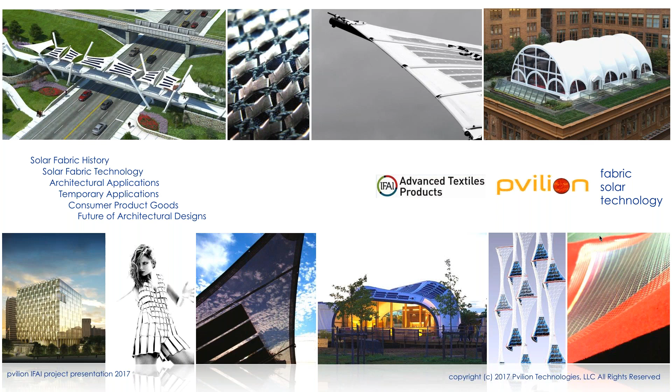So what I'm going to talk about is a little bit about our history, the history of solar fabric, and how it's evolved from a technological standpoint and from a market standpoint, and then get into three main categories. One is architectural applications, which is more on the construction industry, grid-tied, large-scale applications of fabric integrated solar. Then the temporary applications, which might be portable products - umbrellas, canopies, awnings, temporary tents, shade structures. And then the consumer products goods side, which is more of what we're talking about on the small mobile charging, remote location applications.

I also want to emphasize that there is a poll, and I'm going to talk about those three markets and those three different technology opportunities. However, if people can answer what they're most interested in - if we have a disproportionate number of folks who have particular interest in one market or one technology, I'd love to discuss that in more detail. Not that we're going to drop any of the other topics, but I think that's important to realize.

I just want to talk a little bit about our history and where we come from. My partners in Pvillion are Todd Dalland and Robert Lerner, both from the FTL business. So our background is in lightweight structure engineering and tensile structure design. That's kind of our DNA and where we come from, founding FTL in the 1970s, which evolved into a lot of technology development through the 80s and 90s. As part of that technology development, we got into integrating solar cells with fabrics with the express and initial purpose of building portable tents that produce electricity.

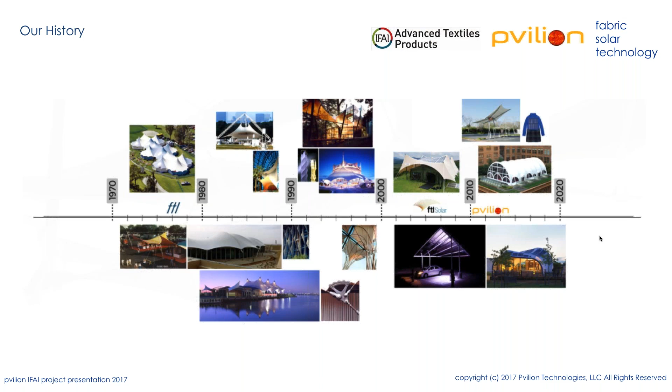That evolved with the U.S. Army in developing military products. Those military products, still in use, have evolved to architectural and temporary applications. So most of our business is currently in commercial applications, though we are involved with the military currently as well.

So I want to talk a little bit about the technology as evolution and sort of where we've come from. A lot of folks think about solar and flexible solar as thin film. It's this sort of early promised lightweight, low-cost, roll-to-roll processing. Just a spoiler alert, thin film did not pan out to be what people thought it was. So we've been working with thin film for decades, but really what it is, it's a product that can be manufactured a lot like on a printing press, where it's a roll-to-roll process where you could build a product or a product line that is miles long, and it's theoretically really cheap to manufacture.

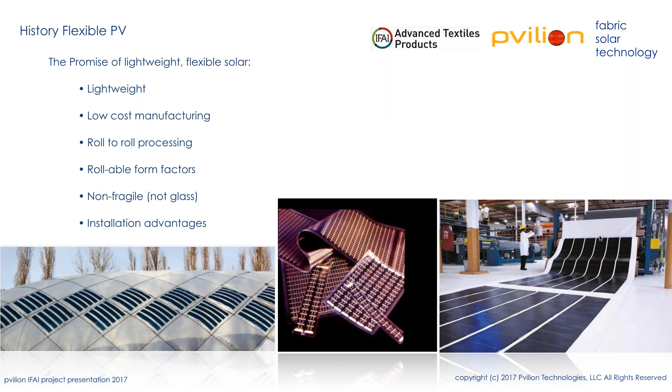However, these promises really didn't pan out. There are tremendously high-quality thin film products out there, but the efficiency is low and the cost is high. So what we have really evolved from the thin film industry, although we still work with a number of different thin film materials. We think that there's promise, but it's not really the promise that was anticipated 20 years ago.

So what we've done is we've really evolved, moving into more traditional materials, using different crystalline and monocrystalline cells integrated into non-traditional materials. But what I am doing is just showing some thin film applications early on of integration of thin film. And the promise is there, which is lightweight, flexible, easy to install. That still is our goal with our products, although we're not using as many thin film devices.

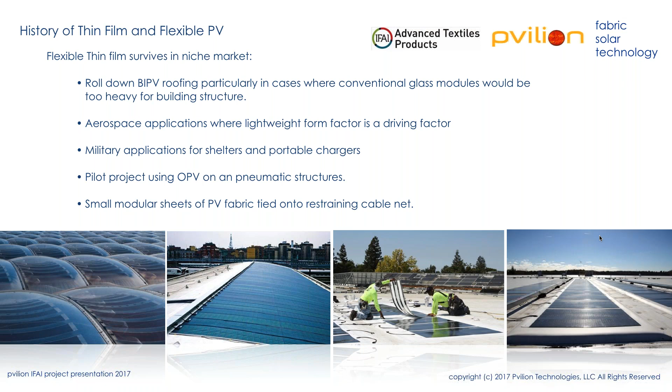So what we've really done is we've evolved in terms of the technology we've been using. I would say most of what we're doing is with monocrystalline material. It's low cost in comparison to a thin film or a super high efficiency flexible cell. It's more traditional - it's what you'd see in any glass mounted array. So what we're doing is taking more traditional solar cells, which are proven, cost-effective, lightweight, easily accessible, and we're laminating them into fabrics and into alternative building materials.

Now, these have been proven over the years, and that's a big reason why we've evolved to work with a lot of monocrystalline. You can see in the middle here two different types of thin film technologies, which have promise and have had promise. But there are some significant cons, mostly that they're expensive and lower efficiency. So what we lose in flexibility with the monocrystalline, we gain with efficiency and price.

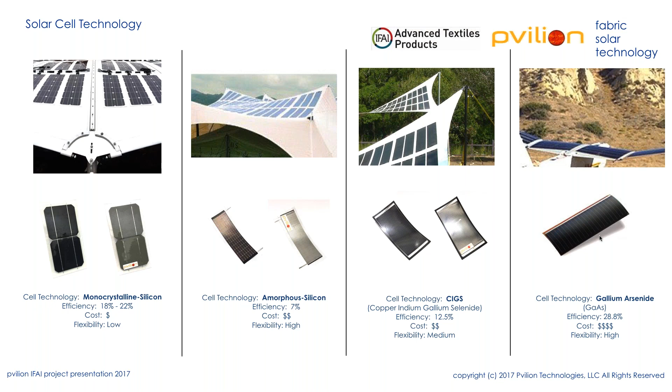Now on the right side, you see a much higher efficiency, much higher cost solution, which might really be for military and high-end commercial applications - drones, UAVs, remote locations, soldier systems. Those are great products, though approximately 100 times the cost of anything else on the market.

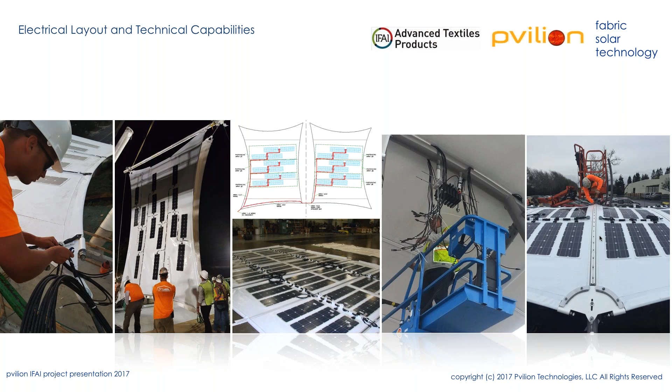So what we're really doing is saying we can take these cells and laminate them into large-scale architectural applications for industrial use and for commercial use. And that means that these are grid-tied. That means they're coming from a place of architectural code. That means they meet NFPA, that means they meet all the UL standards. So what we're doing is structurally engineering products, and also electrically engineering products, to develop systems that are holistically integrated.

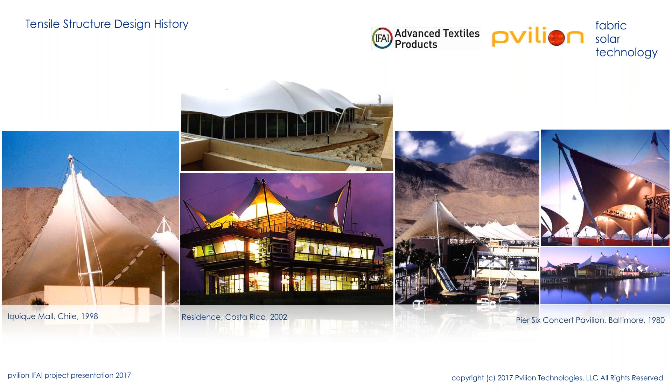I'm going to go backwards a little bit and just get into the types of structures that we've done in the past - not on the technology side, but on the development and engineering side. And then, as you can imagine, any of these types of structures, which we've been developing for decades, can now be solar powered. That is for new structures, for retrofits, for building facades and temporary structures.

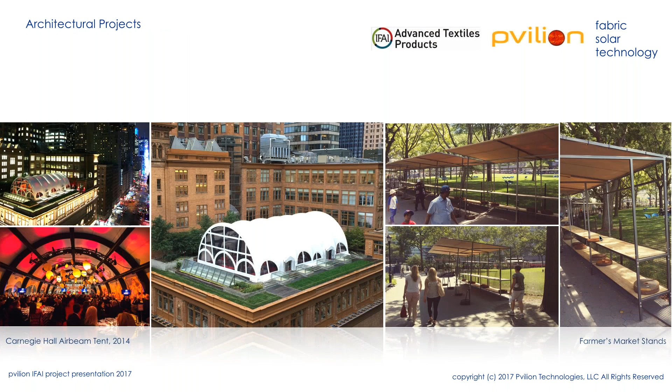So now this is a non-traditional application of solar. Rather than integrating the solar cells into a flat glass laminate with aluminum frame, we're saying we can integrate these cells into perforated aluminum panels, fabric, ETFE, structural membranes, and we can build passive shading elements as part of the architectural design. So what we do is work early on with architects to develop these systems, and then our responsibility is to provide the materials, all the testing, structural engineering certification, electrical engineering certification, and all of the design, build, install requirements for the project.

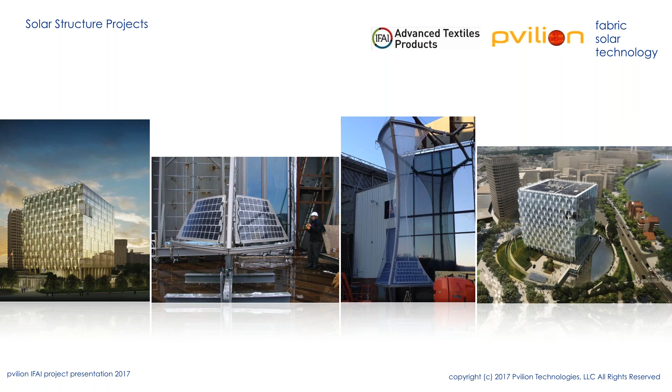Now, while some of the applications are permanent, even if they are permanent, you need to think about things like warranty and replacement. There is minimal maintenance, and when maintenance is done, you have to think about how you'd actually maintain these systems. So we've developed a couple ways of creating double skin roofing membranes, which might be for an industrial application, or for a large-scale tensile structure - stadium roof, amphitheater. What that's really looking at is how you can install and remove these systems without replacing the entire membrane.

So that's for a retrofit or for new construction. What we've done is we've developed a system that can take a fully finished solar membrane with all of the electronics, all of the wiring, all the solar cells laminated in, pack that up in a truck and bring it to site ready to plug and play install on an existing or a new membrane structure.

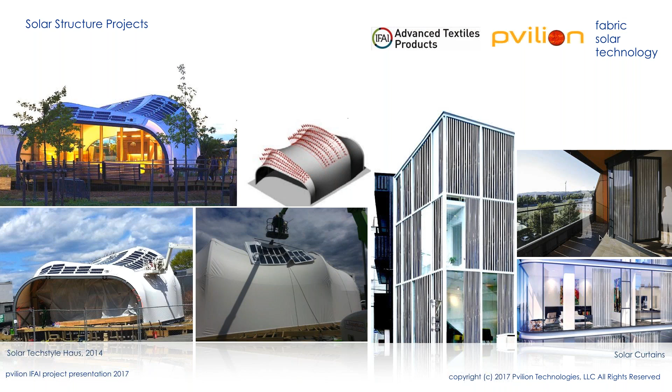So there's full drainage on these systems. There's guttering on the fabric. Really what we're doing is creating a new medium onto which solar can be applied. This isn't a particularly large project, but you can see a fully grid-tied engineered structural system where we provide reaction loads into the bridge and to the bridge engineers, where they're able to work together and coordinate with us.

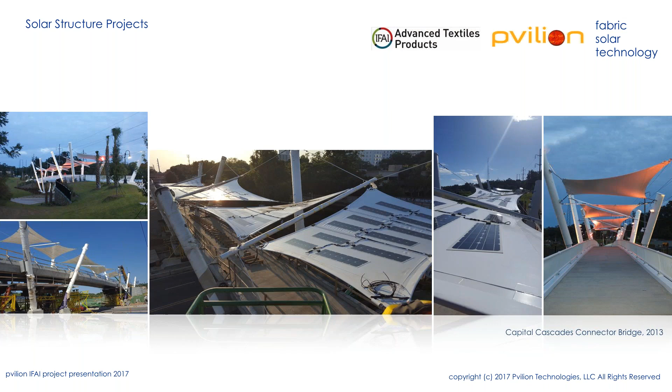You can look at permanent applications in two different ways. You can grid tie them—so even if you have permanent foundations, you might want to grid tie it and sell it back to your utility—or you might want to have a permanent battery system, which means taking the entire system and looking at how to store the energy and use it later.

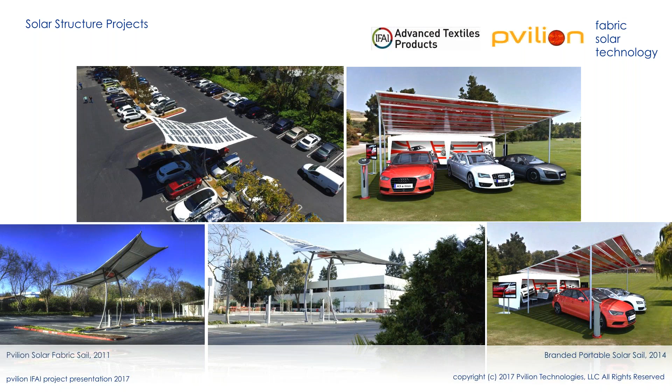Now, on the right, you see more temporary applications. So this is taking the same system, the same concept, and saying we can do traveling road shows, marketing events, event tents, canopies, temporary applications—and this we all developed for the military. So the systems were developed for the military, but now we're moving them into the commercial markets.

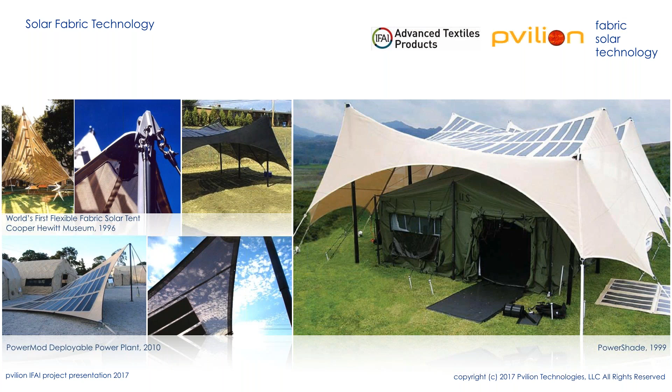We have not rolled these out in large scale, for development reasons, but I think we're at a point where we've really proven out this concept with a number of pilot projects which we've tested over the years. So we're really launching and scaling up our production of these high efficiency solar cells, looking at monocrystalline and fabrics.

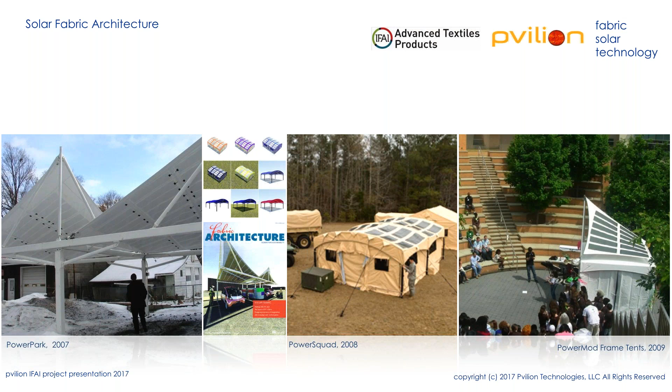Sorry, trying to change the setting here.

Another thing I want to introduce, not particularly specific to fabric, is that we treat metals like fabrics. We create doubly curved membrane structures out of flexible metal—stainless steel, perforated aluminum, or other composite materials. What we're really doing is taking solar cells and laminating them onto a substrate. More than half the time it's fabric, but sometimes aluminum or steel. This is an example of a trellis structure and a carport structure using the same concept of lightweight, large-span structures integrated with solar cells.

There's a question about the type of flexibility you can expect in high wind areas like the desert of California. What we do is look at local building codes—whether permanent or temporary applications, we engineer for whatever the requirements are. Generally, it's the steel structure that's affected by wind and snow loads, not so much the fabric membrane, because these systems are highly engineered, super strong, and heavy duty.

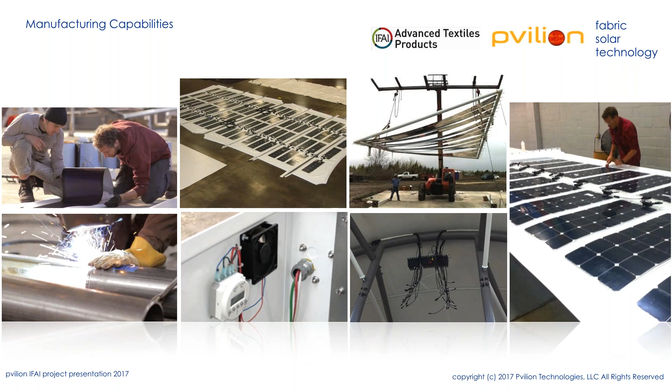We do a lot of our own in-house manufacturing. We work with some third-party contract manufacturers, but we handle our own in-house testing, laminating, electrical testing, and structural testing—you can see that with some of this development. We're not really an R&D lab per se; we're real product developers. Part of the complication is how these materials elongate and how they last for 25 years, because that's really our goal: a 25-year, 80% power production warranty.

That's really the goal for us—to look at these systems and do aging testing and accelerated weather testing for different material properties and fabrics, examining not only adhesion and lamination but also the electrical characteristics and how those might change over time.

Someone asked about safety and UL. The requirement is UL 1703, which isn't necessarily required by every AHJ in the country, but it's the gold standard here, and that's what we shoot for. That involves a 20 or 25-year, 80% or 90% power production warranty—so there is some degradation over time, but UL standards require a certain warranty. As for compliance with model building and fire codes, our systems and fabrics meet all NFPA requirements. Certain applications and jurisdictions don't require that in the same way—some for temporary structures, some for permanent—but I can assure you we comply with whatever local codes apply to what we're building.

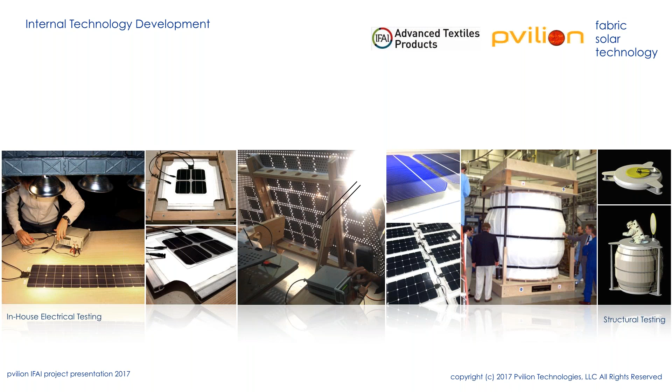I want to get into a little bit more of the architectural facade conversation. I talked about passive shading, but really what we're doing with a lot of architecture firms is looking at how we can kill 2 or 3 birds with one stone, and that's the fundamental purpose of this technology: provide shading, provide shelter, and produce electricity.

There's no way that could be done by just putting PVs on the roof or just putting PVs on the facade. So it's a very different aesthetic and look, but we're really looking at it as a building material and a building tool for architects and contractors to work with.

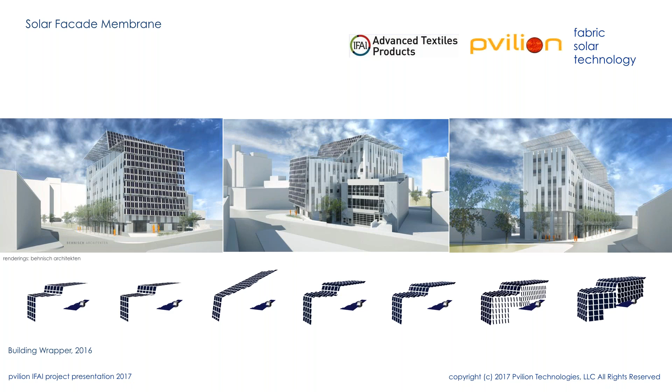Looking at some of these questions: some are asking how small do the individual cells go. The cells can really go as small as you want, depending on the scale. That being said, we really work with a framework of a 5-inch by 5-inch cell or a 6-inch by 6-inch cell, so that's looking at a building block as a pixel architecturally.

So you have this 6-inch by 6-inch cell, and the question is how do you paint with it, how do you use it as a building material or building block. What we're doing with those cells is developing lamination systems and wiring systems for all those cells to work together into a particular membrane.

While a solar panel's goal is to have a positive and negative coming off of one panel, we have a positive and negative, or an AC, coming off of an entire fabric system. That might be a permanent application or a temporary application. But the cells themselves can get much smaller - it just depends on the scale.

We're working with some temporary umbrella structures, providing solar shading, shelter, and electricity generation, for off-grid applications where you want USB charging, some LED lighting, and laptops to charge. The goal is really to produce electricity in a remote location without running conduit to that area, providing a pre-packaged system with solar cells built into the membrane structure.

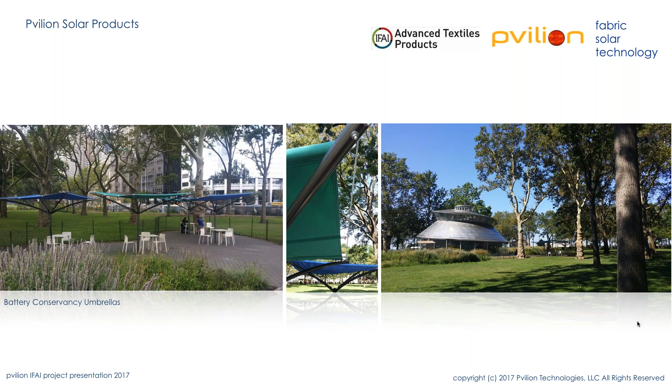Going a little bit beyond the temporary application, the ultimate temporary application is looking at consumer electronics. We're looking at these wearable products, and that doesn't necessarily mean it has a Bluetooth sensor and a heart rate monitor. Really what we're trying to do is provide low-hanging fruit, which is charging devices that you already have.

That means the integration of these products into different garments, into bags, into backpacks, and the market for these types of products is tremendous. The integration of the solar cells and the fabrics has evolved over time.

2-3 years ago, we worked with Tommy Hilfiger on launching a solar-powered jacket. That was a pretty big success from a market standpoint, and now we're working with a number of different partners to launch similar products. What we launched with them was pretty clunky and heavy, more of a proof of concept, and now we're in a much more flexible, much more reliable, less clunky standpoint.

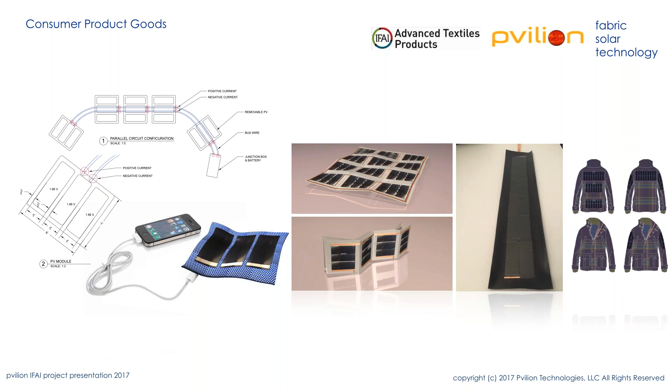We're offering our services and our materials to third-party brands. We're not launching our own products, but we're working with a number of brands to launch new products.

As we come to a close, these are some of the applications where you're talking about getting the electronics into the fibers, and that really is the future. The current state of the art is mostly laminate based, and the next step, which we're developing with partners, is systems that are actually sewn in to the yarns and laminated into the fibers - that really is our next step.

That's not here today, but that's a couple years out. We're really saying, rather than having a heavy laminate, how do we make this more flexible and lighter weight? That's on the consumer product side, and we're seeing a ton of demand there.

On the architectural side, it's important to look at different systems taking advantage of doubly curved surfaces and complex features with parametric modeling. Taking a rectangular building and putting solar panels on the roof is pretty straightforward. What we're doing is very different, saying how do we take complex curvature, complex surfaces whose intention is really interesting form, and integrate our solar cells into those materials. That's our next frontier, large scale complex curvature and large scale applications for architectural use, then scaling that down into commercial use as well.